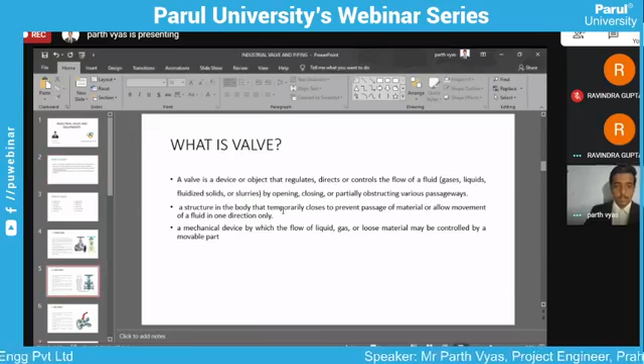Ravindra sir? Yes, Parth. Is the globe valve displayed or not? Yeah, the PPT is visible, but the slide will not change. So just press the slide mode and then go next. Okay, I'll do it again. Is it visible now? It's visible now. Do the slide view. Okay, again I'm doing slide view. It is visible, but not in slide view. Okay, so now let's continue with this view. Okay, it's okay.

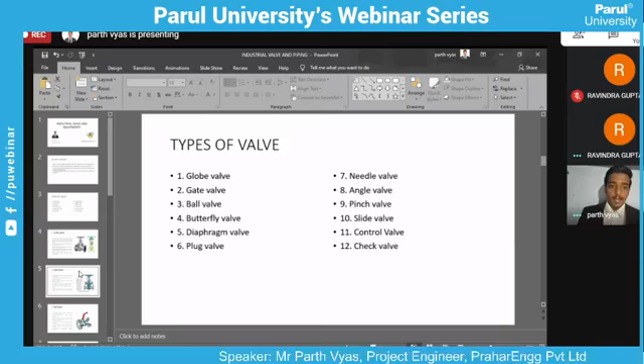The gate valve is light in weight, economic, and offers low pressure drop. The gate valve is common in chemical process industries because it gives accurate flow control. As we discussed earlier, it prevents the flow at the vertical angle. That is the reason it gives accurate flow control.

The gate valve can be used up to 20 kg per centimeter square, up to 675 Celsius. This given is the working temperature. It can exceed up to it. Materials of the gate valve are cast iron, carbon steel, stainless steel, ductile iron, bronze, nickel alloys, etc.

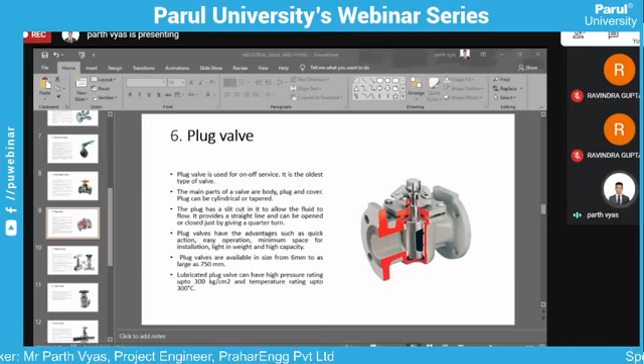Okay, the plug has a slit cut to allow the fluid to flow. It provides a straight line and can be opened or closed just by giving a quarter turn. As I told you, it requires only a quarter turn from here to operate the valve and control the flow.

Once it is moved, the area will be open for the material to flow. I hope it is understandable.

The plug valve has advantages such as quick action, easy operation, minimum space for installation, light in weight, and high capacity. Yes, it provides very tremendous ability to still prevent the flow.

Ball valve also has very good and easy construction, easy to understand. Globe valve is also very easy to understand, as we see.

And yes, it has this slit cut. That is the reason it provides more efficient, comparatively better flow resistance or flow control, we can say. Plug valves have the advantage of quick actions, as we discussed. It requires only one motion from here, input here, and the work will happen.

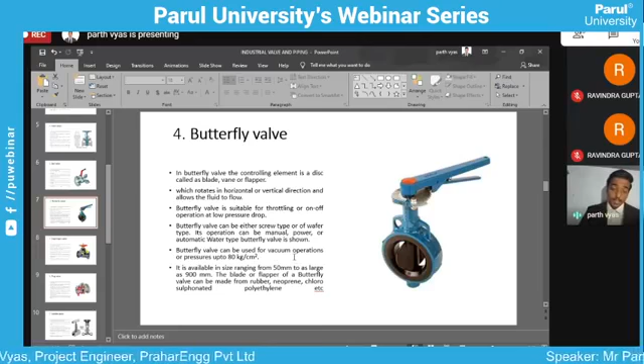Butterfly valve starts from 50 mm. And we see this one, the diaphragm valve, it started from 6 mm—sorry, plug valve starts from 6 mm. So just imagine how accurate it can be and how we can utilize it very well in very convenient places.

It requires very low space to occupy comparatively. Okay, just because it contains a diaphragm, the diaphragm valve has more space to occupy, and it is comparatively costly also, just because we are using a diaphragm in it. The plug valve has very simple construction, as we discussed earlier.

Lubricated plug valve can have high pressure rating up to 300 kg per centimeter square, and temperature rating up to 300 Celsius. Okay, for the working temperature, it has very limitations as we compare with the other previous valves.

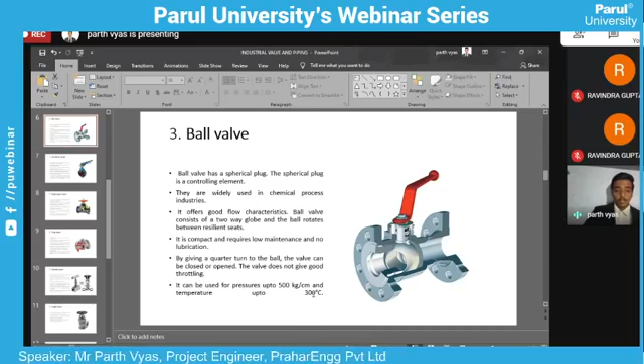So here we can see the diaphragm valve was capable of working under 220 Celsius. Ball valve was able to work at 300 Celsius also. Gate valve was able to work at 675 Celsius also. So for this, it has some limitations in working temperature.

But overall, if we say, this is the oldest type of valve, as we discussed. So after that, they invented different ways to resist the flow and kept inventing different methods. So they introduced such valves. I hope this is understandable. Now coming to the next slide.

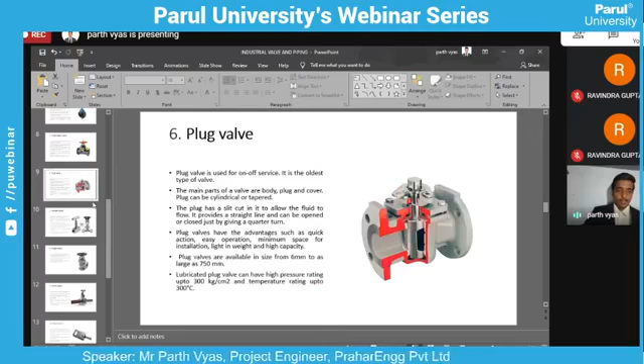The previous one, the plug valve, was only able to work at 300 kg per centimeter square, and the needle valve is able to work at 650 kg per centimeter square, and the temperature is 260.

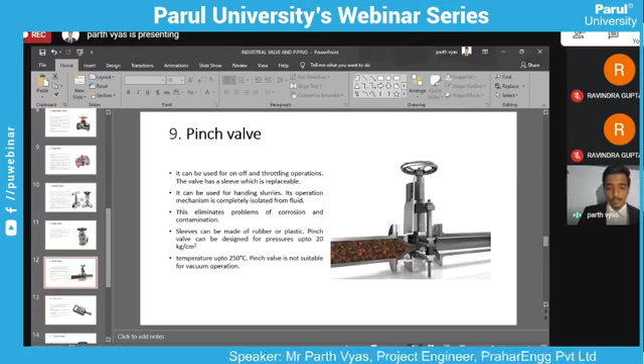It can be used for on-off and throttling operations. Yes, the valve has a sleeve, which is replaceable. This part will be replaceable. It's called sleeve.

It can be used for handling slurries. When it requires slurries, it can be used. Its operations mechanism is completely isolated from fluid. Yes, it is very isolated. The rest are not isolated. This one is isolated. This eliminates the problem of corrosions and contaminations.

Sleeves can be made of rubber or plastic. This is the sleeve. It can be rubber. It can be made of rubber or from the plastics.

Pinch valve can be designed for pressure up to 20 kg per centimeter square, not more than that. It has these working limitations. The temperature up to 250 Celsius; working temperature is 250 only. If we compare this one, the needle valve, it was having 260.

Pinch valve is not suitable for vacuum operations. This butterfly valve can be used for vacuum operations; same as pinch valve cannot be used for vacuum purpose, vacuum line.

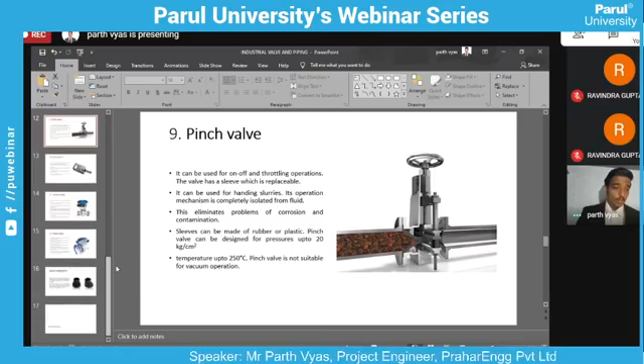Slide valves. Here we can see it can be electronically operated or hydraulically. It is very simple construction. It is used for controlling low pressure flow of gases, liquid, and fluidized solids.

It is very simple as gate valve. You can see in gate valve it was working the same way, but here the hand wheel was given.

It can be operated electronically also; just we have to place a motor over here. The same construction and same principle can be applicable here. The shape and all is different, but almost it is similar, having perpendicular flow resistance.

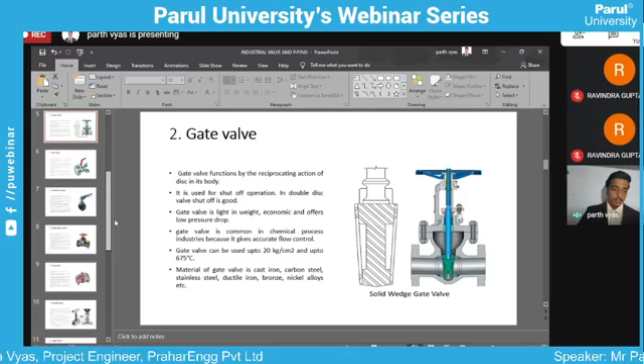In this also we have perpendicular resistance, but it can be used as a box type for box cross-sectional material flow. This is not compulsory that it will only work in pipelines; if you want to transfer something like coal from one container to another, it will also help, it will also be utilized.

It has two parallel body seats between which the disc slides, same as the gate valve, but it is advanced. This is because they have provided provisions of hydraulic actuators. The disc acts as a gate; it can be considered as a gate.

The pressure drop offered by the slide valve is very low. The working capacity is 25 kg per centimeter square, which is very low comparatively, so it can't be used at high pressure applications.

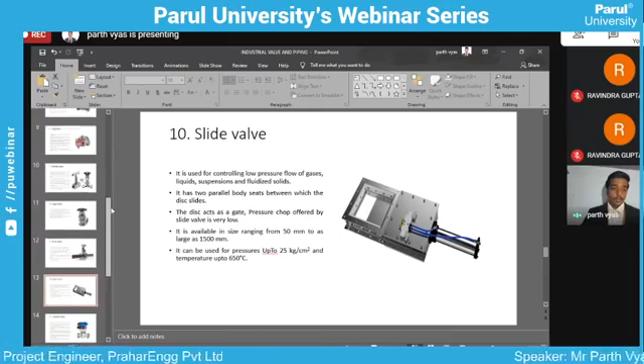It is available in size ranging from 50 to as large as 1500. So we can see this is the maximum valve size that we learned today. The previous ones were the gate valve and the globe valve.

Okay, and this is the maximum limit of size the valve can have. Okay, 1500 mm. So just imagine how large it can be. Okay, so it can be used for solid materials also. Okay, it is not compulsory that it is only applicable in fluid transportation.

Okay, it can be used for pressure up to 25 kg per centimeter square and temperature up to 650. Okay, so as I told you, it can be used to transfer any solid or semi-solid materials also, which are not easy to transfer through pipelines. Okay, so this will be applicable there.

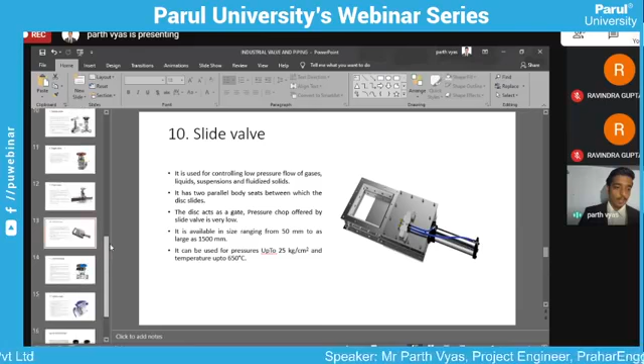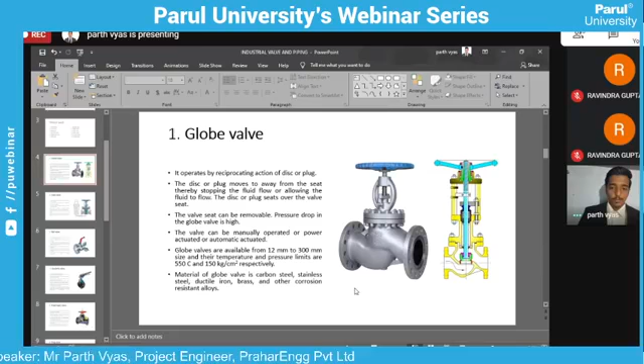So these were the types of valves, and still there are two remaining. It is the control valve. Okay, so it looks the same as a globe valve. Here, let me show you again. See, okay, the cross sections of both are similar. If you see the cross section of the globe valve, it is the same.

Okay, now the actuators and gauges are provided. Here is a diaphragm also. Okay, it is necessary for an automatic process control system. Okay, it is actually a very advanced valve and one of the most expensive valves. It can be called a flow control valve.

Okay, this is for very sensitive or very hazardous processes. Okay, so where continuous inspection and all these things are required, we utilize such valves to control the process and for the prevention of any hazards. Okay, it can be used for controlling level, flow rate, temperature, pressure, etc. So here you can understand it. This all can be controlled.

Okay, controlling the level. Okay, if the valve is placed between a pump and a tank, and the tank is almost filled fully, this valve will get the signal from the control office that the tank is almost full. Okay, so to minimize the flow, they will provide the signal and the work will happen. Okay, the flow will be resisted. It is called controlling level.

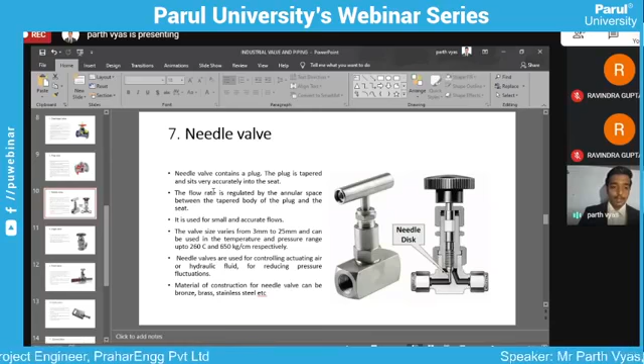Okay, in the previous one, the needle valve, the word was there that the flow can be controlled, regulated. Okay, and all these characteristics are available. All the capabilities of these valves are available in the control valve, to regulate and control the flow and to control levels. Okay, so we can say that this is the most advanced type of valve.

The flow rate, as discussed, if we require the minimum flow rate, we can adjust it electronically also. Okay, it will sense the temperature also, and if we require more control on pressure and temperature, it will change the flow rate and control it. The selection of a control valve involves its operation mechanism, process conditions, as well as requirements.

Yes, as I told you, this is the most expensive valve also. Okay, so it is used in limited applications. Okay, but where it is required, we must use it, to prevent hazards. The selection of a control valve involves its operation mechanism. Okay, so first we have to analyze where we can utilize this valve.

Okay, for example, let me tell you, if we want to control fire water. Okay, fire water is used for hazardous purposes, so we need very high accuracy and very regular checking or drills for safety purposes. So I'm just giving an example, it is used in fire water safety, or for fluids which are very hazardous like acid, LPG, hazardous gas, I would say crude. Crude is one of the hazardous ones also.

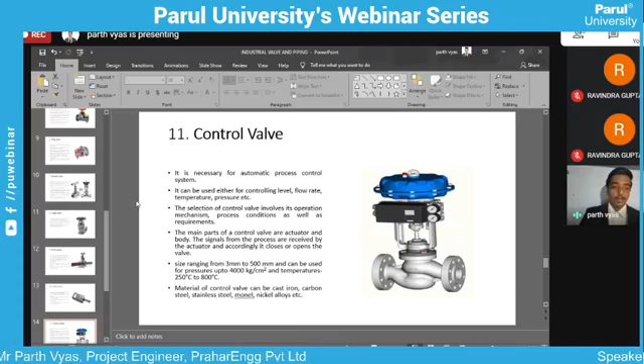Okay, and then last one is check valve. Okay, there are also combinations you can see of butterfly valve. Okay, they were providing butterfly sections also. Okay, it is used to prevent flow reversal. Okay, fluid pressure keeps the valve open. Okay, it is closed either by pressure of fluid or by weight of the check system.

It is used to prevent the flow reversal. It will provide only one way direction flow. Okay, it is also called non-return valve, right? It is used for fluid velocities where flow reversal is not frequent, right? Where the flow reversal is not frequent. Swing check valve can be used on the discharge side of the pressure relief valve. That is also another different way,

terminology, pressure relief valve. It will have the same working as this angle valve. Okay, in a pressure regulating valve, what will happen if flow is coming from this? Okay, they will place a spring mechanism over these sections, and the spring is designed in such a way. Okay, if the fluid pressure is maximum, then the spring will be compressed and the flow will have passage to flow ahead.

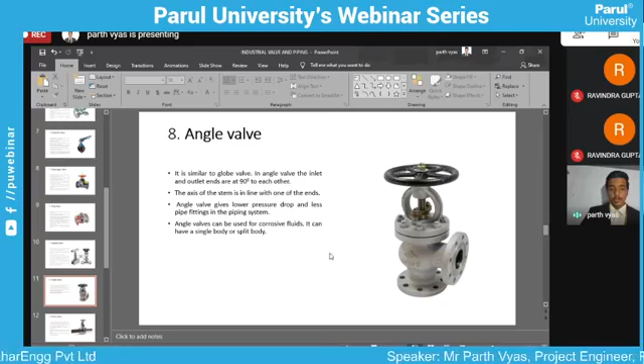Okay, now I would like to share one other thing. Okay, apart from valves in the industry, generally the symbols are used in isometric diagrams. Okay, we'll have a quick overview of it. Contains gauges also. Here you can see there's a symbol of pressure gauges. Okay, this is for learning.

Okay, there's a flow meter and it can be mentioned in this way in isometric drawings or in what is called piping and instrumentation diagram. Okay, that will be different. It is also called the language of P&ID.

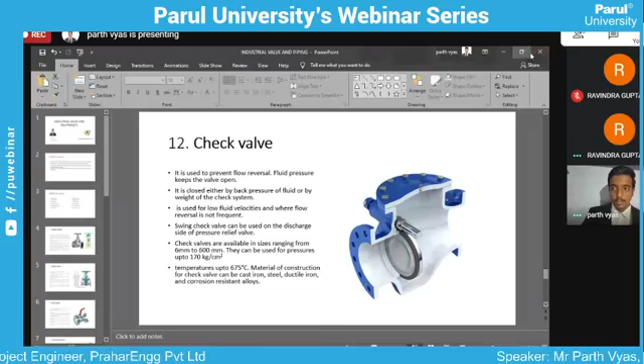Is it visible? No, Parth. Ravinder said it. No, Parth. Just close the PPT and again share this time. Okay. Is it visible now? Yeah. Is it visible now? No, now it's gone. Now again sharing the PPT. Okay, 1 minute. Okay.

Now sharing again. Okay, I'm doing it. Okay. So, is it visible now? Yes. Okay, thank you.

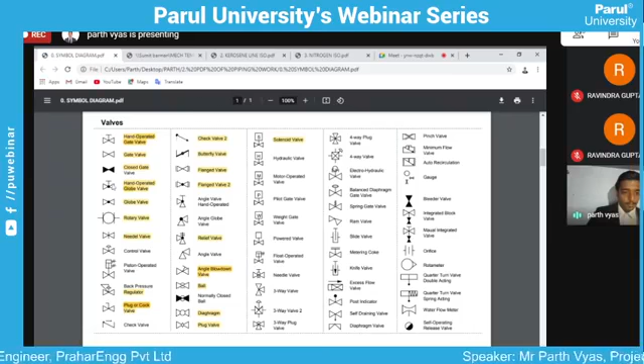The globe valve has a cross section like a ball. Hand operated means they have provided a handle over here. The globe valve, that was simple. The plug valve that we discussed had a similar slot cut, so this can be identified.

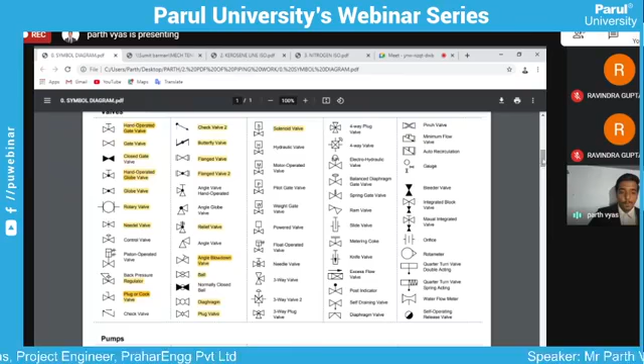As I told, there are a lot of types of valves; we can see this three-way valve. There's the needle valve that we discussed earlier. There's a diaphragm valve; you can see the diaphragm disc-like profile over here, so we can identify this as a diaphragm valve. There are a lot of different gauges and equipment, a lot of things to discuss, but due to limitations of time, I will keep going fast.

So now let's conclude. I hope the webinar was very fruitful and enjoyable. You may have learned a lot of things, types of valves and all these things. I hope you learned something new today.